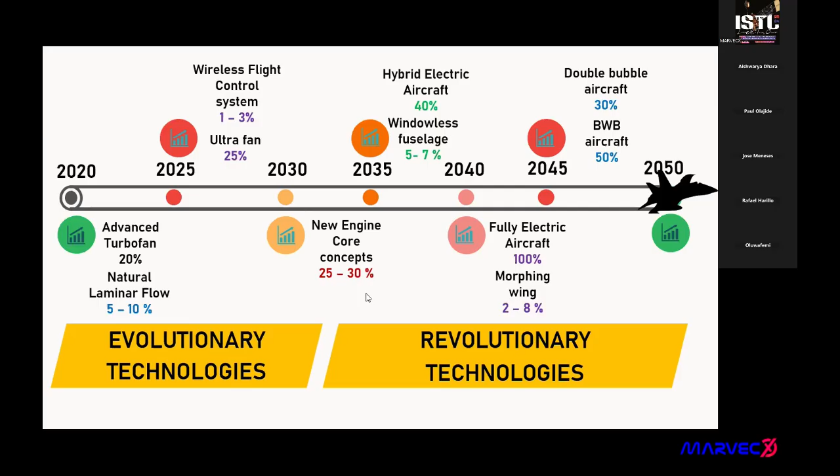As of now, we are seeing Airbus 350 flights, but in the future that's also going to get obsoleted, and we're going to see double bubble aircraft, where NASA is working on this kind of project, and more into blended wing body aircraft, where around 50% of carbon emissions and fuel burn is going to get reduced. Now, how to get that reduced, I will give you some basic overview.

Before getting started, as this session is primarily focused on machine learning and AI, let me give you a brief. What is AI? Maybe there are some audience who are quite new with what is AI.

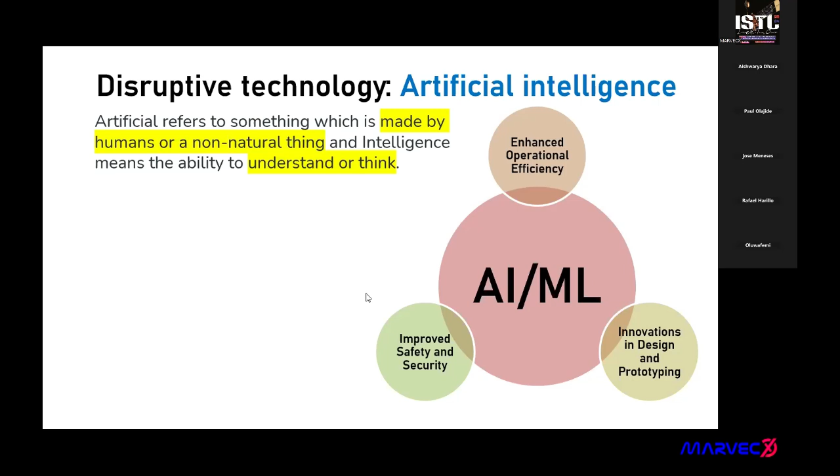When someone is creating something, or we can say a human is involved, which is not naturally formed, a human is involved to make that thing or to understand it, that becomes artificial intelligence. So a human is involved, reproducing the existing model. That is artificial intelligence.

Now how does artificial intelligence differ from machine learning? Machine learning is a part of artificial intelligence. A human is doing some programming, understanding the parameters, rephrasing the parameters, making something, and checking whether these things are feasible with one another or not. As I said, machine learning is part of AI, and nowadays we are using machine learning across different domains.

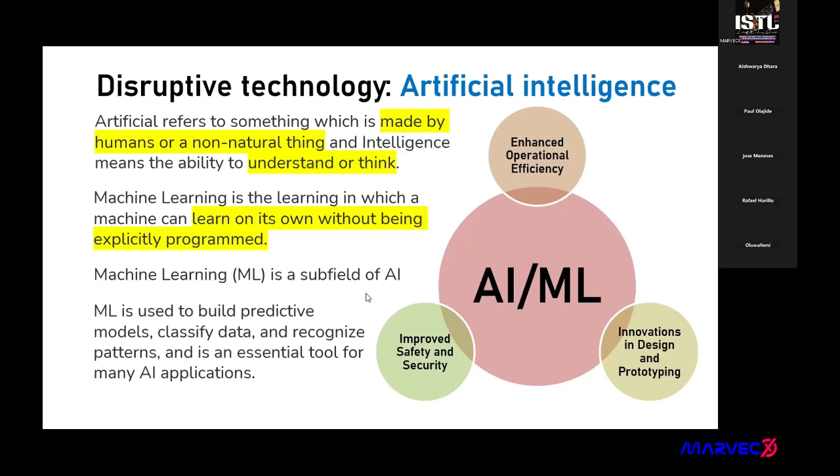Let's understand what is machine learning. Basically, machine learning is of different types. We have supervised machine learning, unsupervised, semi-supervised, and reinforcement learning. These are the prime types of machine learning, and furthermore this has been clustered into different other domains.

Here I have pointed out some of the very exciting, or most of the approaches or types of machine learning that are randomly used in the research field, especially in aerospace. If you are planning to propel your career towards machine learning, or already working on it, you can take it for granted that these are the following methods to consider.

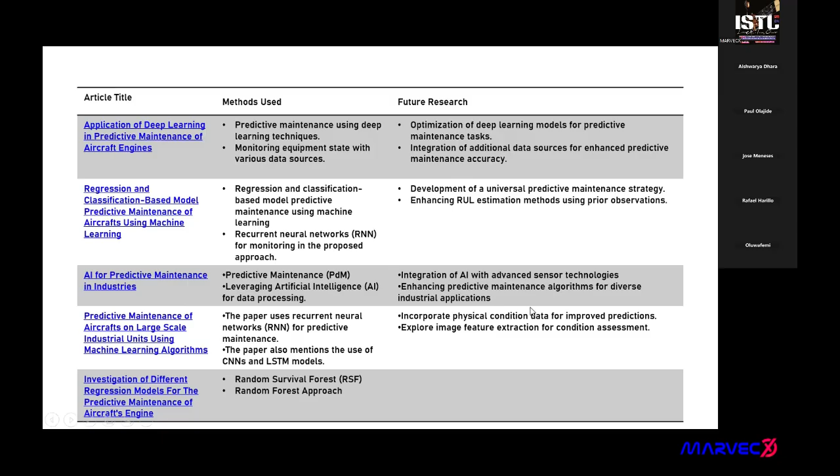How am I telling you this? Because there are certain research papers with exciting things they have mentioned, the methods, the way they have implemented on different applications. See, the application of deep learning in predictive maintenance of aircraft engines. They have used deep learning techniques, and in future they have said how further they can improve it. Each of these different types has a different way of approach, and they have given future insights on how we can further improve it and bring back better accuracy.

Understanding these facts, here I'm going to give you a basic 10 fundamentals outline of where and how we can use AI and machine learning in the aerospace and defense sector.

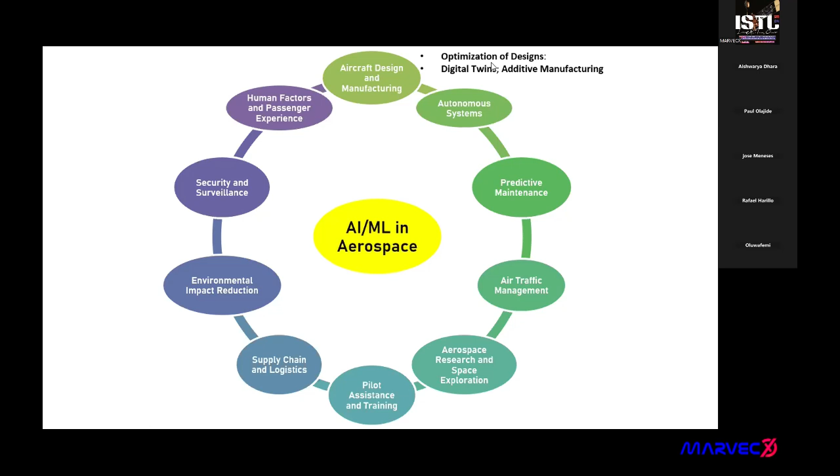The first and foremost I'm going to highlight here is aircraft design and manufacturing sector. How we can use it here, especially in optimizing design, digital twins, and additive manufacturing. But if I have to expand that idea behind aircraft design and manufacturing, there are further classifications, because when we say the simple word aircraft design, it's not as simple as it looks. There are so many things involved with aircraft design.

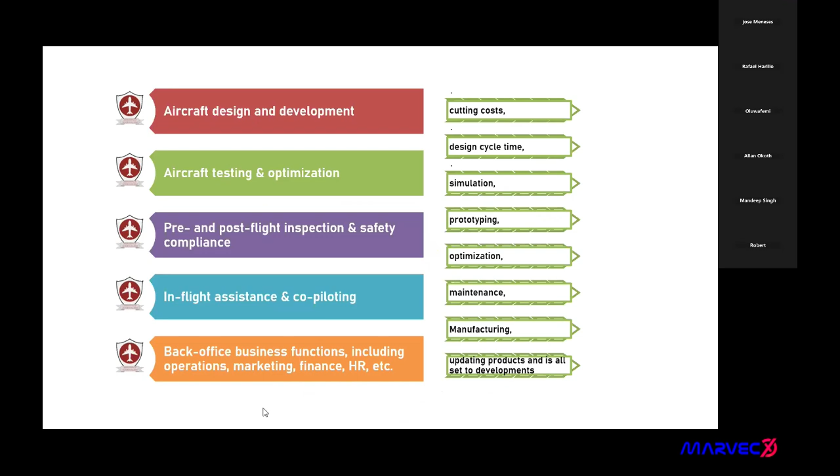There's development, testing, optimization, and once you have manufactured it, pre-flight inspection, post-flight inspection, checking safety compliances, then pilot assistance, co-piloting, then marketing. There are so many things, maintenance. There's a whole list ahead of me.

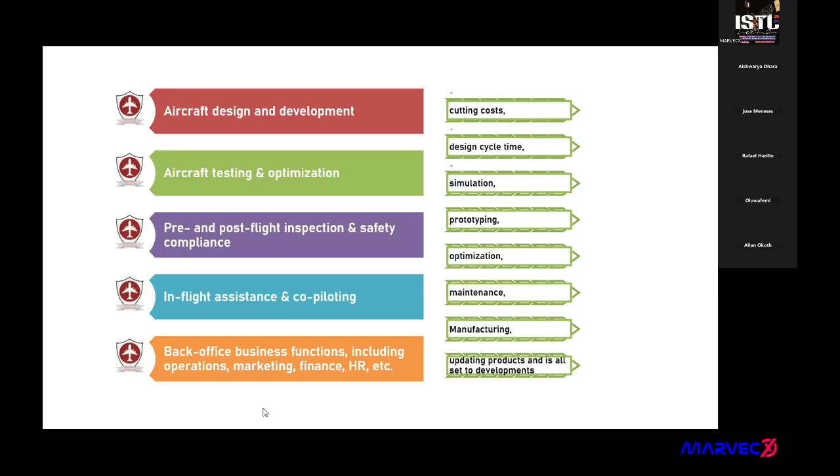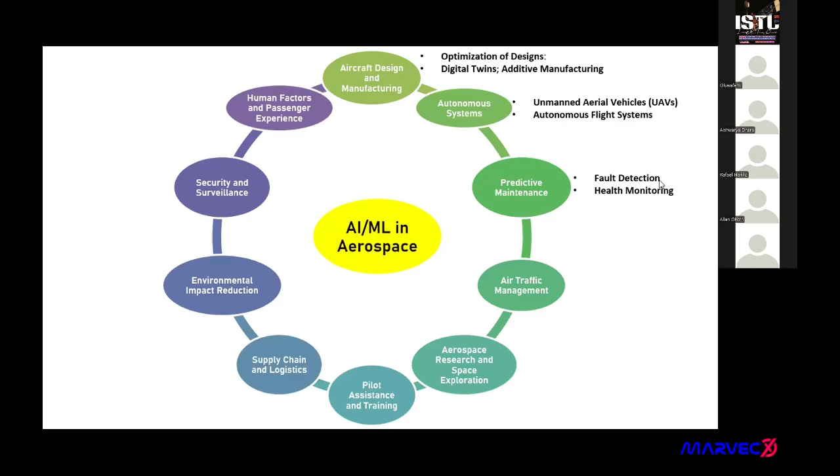Let me highlight predictive maintenance. What is it? It's about fault detection. You have an engine, and how will you predict that everything is fine with it, because there are so many complex designs and systems for an engine. So you use AI, or you use sensors, so that if anything goes wrong, you can find it.

Nowadays, in fact, in industries, they have started to use this practice of detecting faults. There is a pipeline in the industry or a boiler. If the temperature exceeds a certain level, they are able to predict that. So there is a lot of R&D happening in this fault detection.

Then comes health monitoring. This fault detection is one side, health monitoring is also playing a vital role. Nowadays they are utilizing this for agricultural sectors. Like you have a drone, and imagine you have an apple farm, or any kind of farm, and the drone is loitering across the farm.

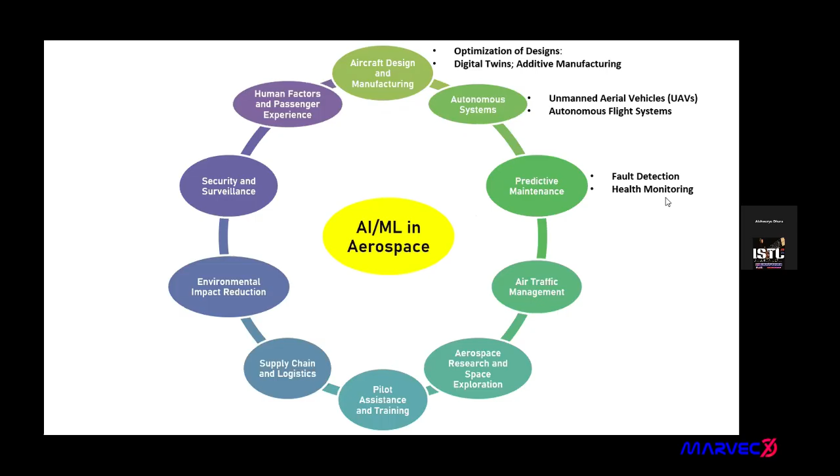With path planning and all, it is finding which particular tree is not healthy, or the fruits are not healthy, so it predicts and gives you a beep sound, and accordingly you can identify which is wrong, right? Accordingly you can do a lot of activities.

Now take an aircraft, and they give you a scheduling of it. So this aircraft has gone for this, now it is time for check A, check B, check C, and check D. So a lot of things can be utilized using predictive maintenance. It's a very wide scope if anyone is propelling their career or wants to start their own startup company.

Next is air traffic control management. As you know, there are certain busy airports, and nowadays we can find airports with queues on the runway or the taxiing zone. So they are implementing in their portal things like flight scheduling optimization, collision avoidance systems, and efficient airspace utilization. How effectively they can utilize the space depends on country to country, and how each governing rule applies.

Next comes aerospace research and space exploration. As many of you might know, the main motto of this talk is sustainable development, how we can do it using AI and ML. We are launching a rocket, we are launching a satellite, that's fine, but how can we make it more effective?

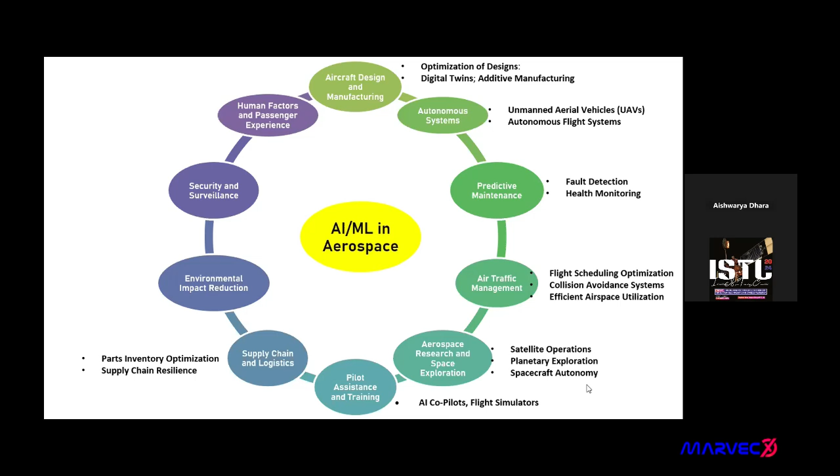Now, many countries have already started this work using AI/ML in supply chain and logistics. For inventory or supply chain resilience, they can plan where the inventory sectors are, how they can transport from one point to another. AI plays a very vital role, and most defense sectors are already practicing this for their supply chain and logistics.

Next, as I have said, this is about environmental impact reduction and how AI/ML helps. I will give you a small practical demonstration from one of my research projects, just the highlights of how using AI/ML you can achieve environmental impact reduction.

So it has a very vital role in fuel efficiency and optimization, and eco-friendly aircraft design. Nowadays there are different aircrafts coming up, including electric vehicle aircraft that Airbus is planning to manufacture in the 2050s, and many more aircrafts coming in the future. All of them are working on AI and ML when it comes to aircraft design, saving fuel, or reducing carbon footprints.

Security and surveillance is also quite relevant, with monitoring systems and cybersecurity. Both play a very vital role when it comes to AI and ML.

Now let me highlight one more important point, the human factor and passenger experience. You might be thinking, okay, humans are not involved in AI and ML, so how can we give a human factor and passenger experience? Yes, it plays a very vital role for any airlines, because the first and foremost priority of running any airline is to take care of

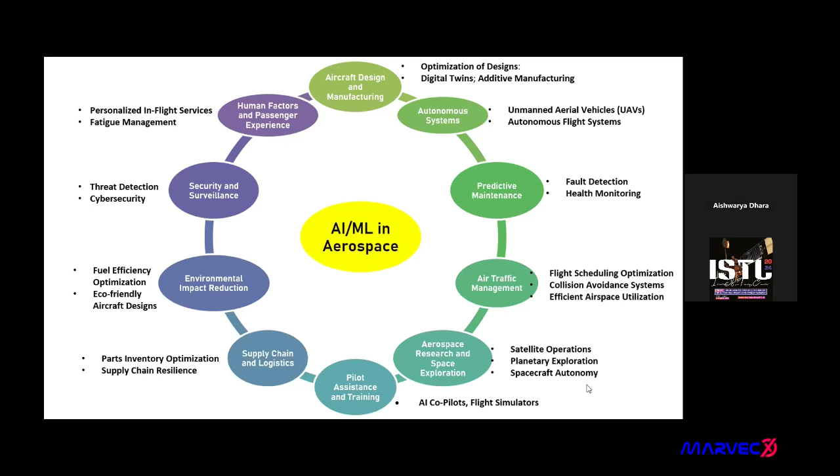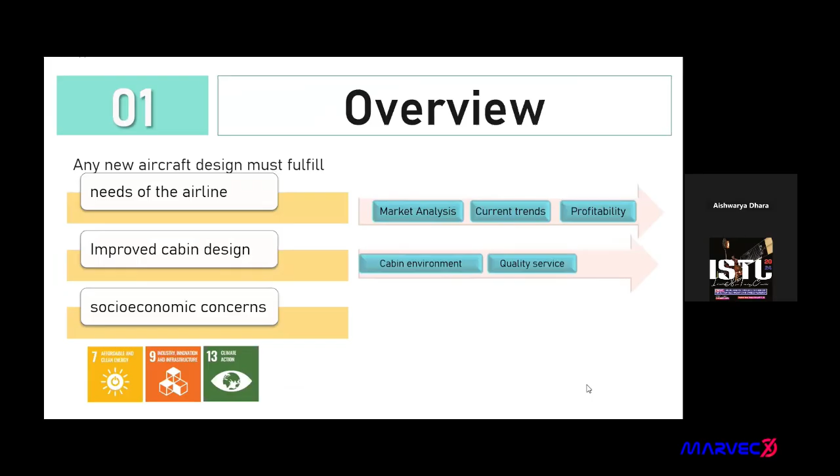Now, coming back, as I said I'm going to focus on some practicals. Let me give you more highlights on new aircraft design. We need to understand market trends and improve profitability, and as I highlighted with human comforts, you should take care of cabin environment, quality services, and ambience. Now let me connect this to how it plays a vital role in socio-economic concerns.

One current trend is a concept called retrofit—reduced emission of transport aircraft operations by fleetwise implementation of new technology. This particular term explains a lot.

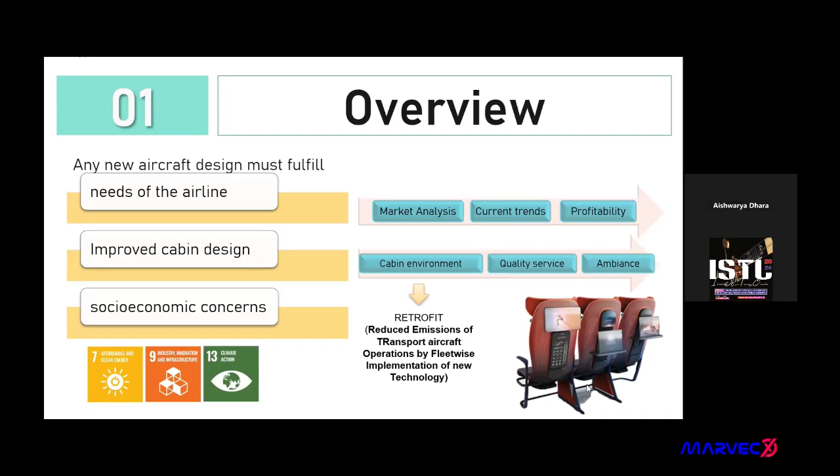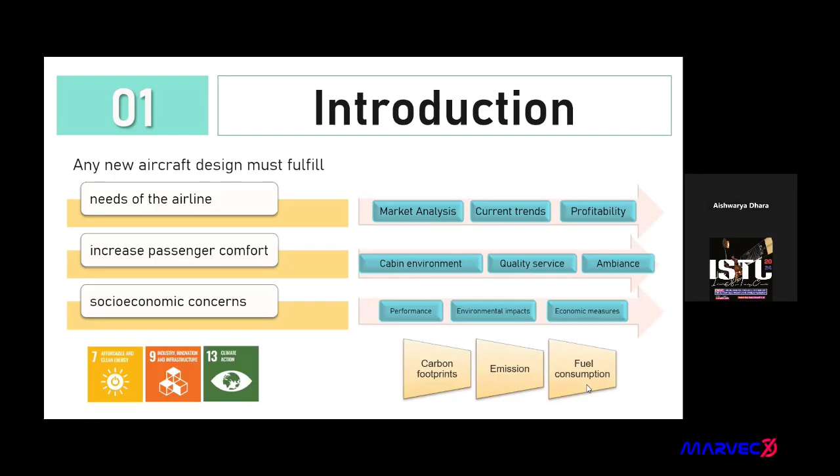You'll be surprised to know how quality service plays a vital role in terms of performance, environmental impacts, and economic measures. On the other side, carbon footprints, emissions, and fuel consumption are quite related with one another.

All of this comes under retrofit, which helps reduce emissions. At the same time, let me give you some statistical values on the percentage that helps with reduction.

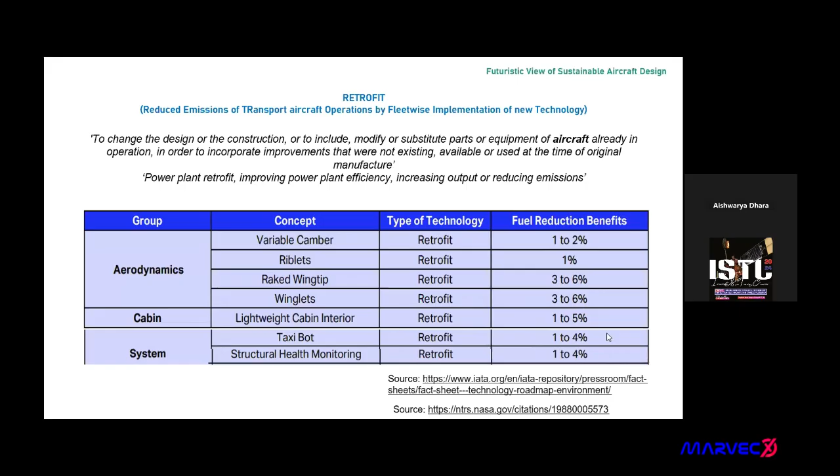Now let me give you some more highlights. Who are the people really working on it? When it comes to emission, emission basically emits not only from the design that you make, but the engine plays a vital role too. So what are the prime engines we can see in the upcoming era?

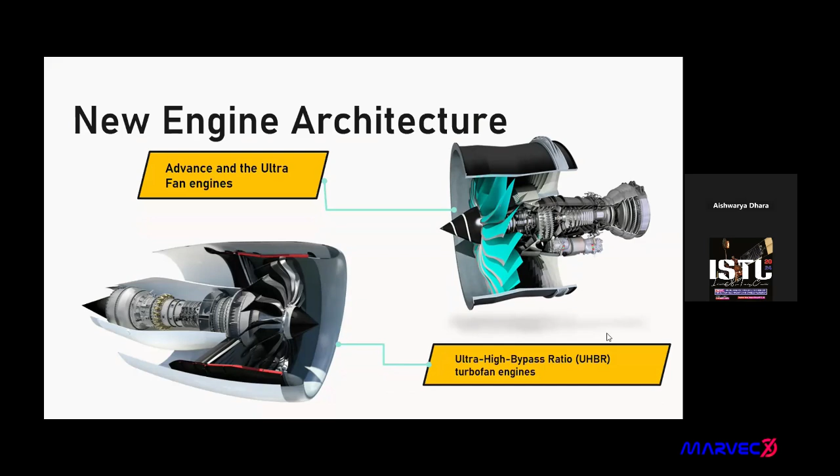That is advanced ultra fan engines. Another one is ultra high bypass ratio turbofans, where this bypass ratio is going to be more than 10. Second is the aircraft system.

As you can see how much amount is used during the taxiing phase, if we are using electric taxiing. There is a company called Safran developing this concept. Around 51 percent of nitrogen oxides, 61 percent of carbon dioxide, 62 percent of hydrocarbon, and around 73 percent of carbon monoxide can be reduced. This process takes hardly 3 to 6 minutes to perform, and in that time this much carbon emission can be reduced. It's a lot of revolution, you can say.

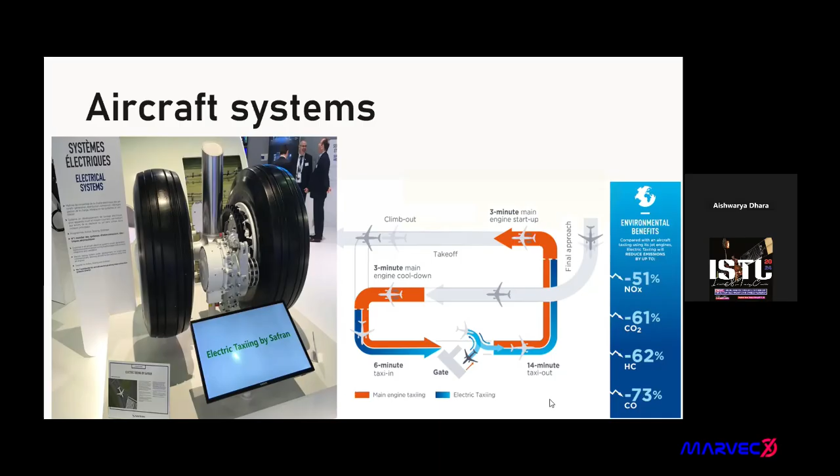Now I will give you a brief of some more research papers working on AI and ML, and what is the basic approach to undergo machine learning. I will give you an overview of my research, how I have reduced a lot, how to find the robustness of your model, and how you can implement it in real world scenarios.

Basically, when you want to start machine learning, the first and foremost thing required is data collection. So what are the different parameters when you're collecting data? For example, I will show you this data.

Now the question comes, how will you know the data you have taken is sufficient, or whether the number of rows, number of columns, or any other parameters are needed? The basic understanding is that first is data collection, and you need a large amount of dataset when you want to work on the machine learning approach.

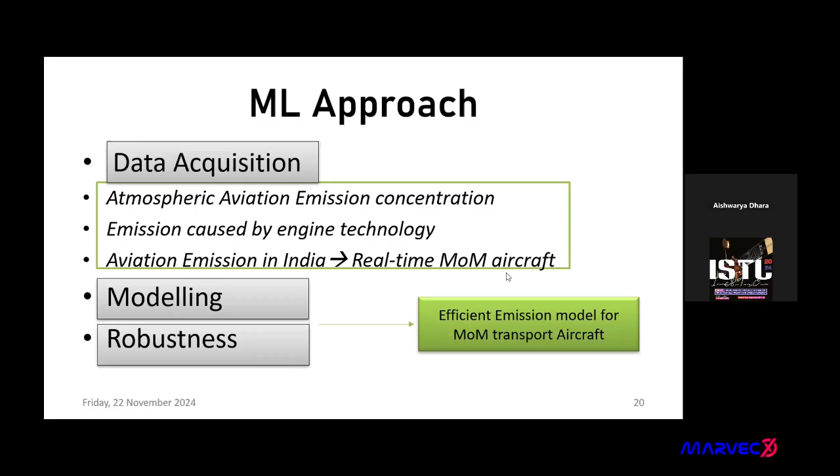The first and foremost thing when proceeding is to identify the correlation factors, so that we can mathematically find the relationships. Here I have used a linear regression method. In linear regression, we identify the parameter using a value ranging between 0 to 1. If it is close to 1, that parameter is strongly connected; if it is less than 0.5, it means very less than moderate value.

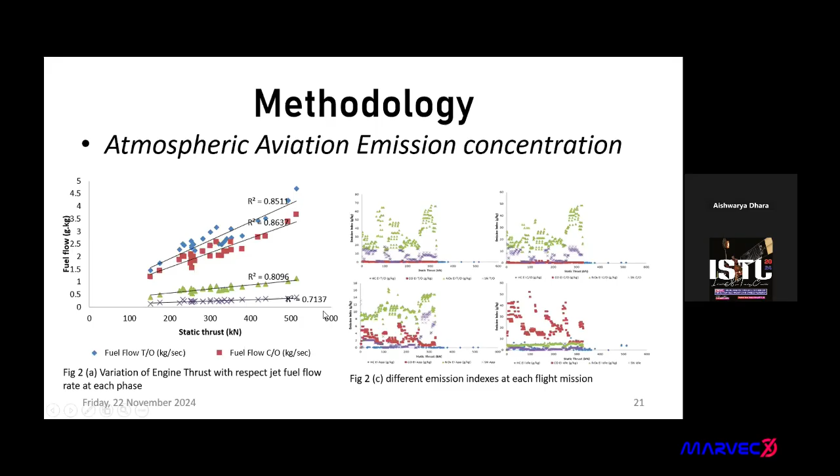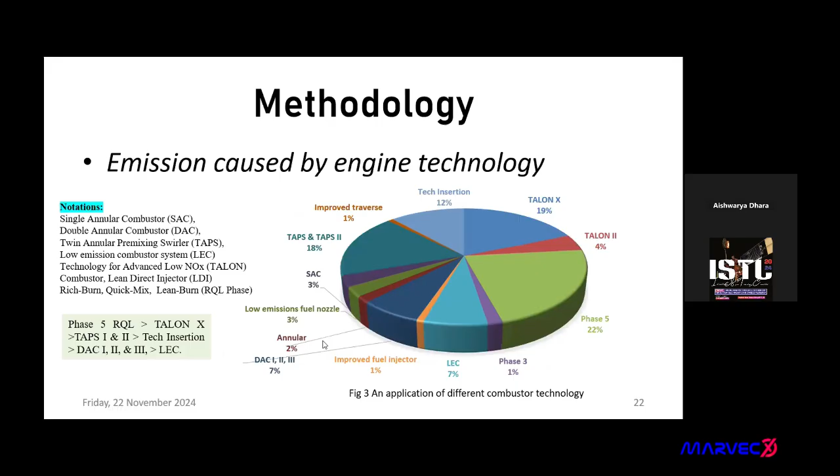Here you can see the parameters I obtained, which are close to 1, that is 0.85, 0.86, 0.8, and 0.7, close to that. So understanding these parameters and how they play a very vital role in engine technologies, each engine has its own technology and implementation, right?

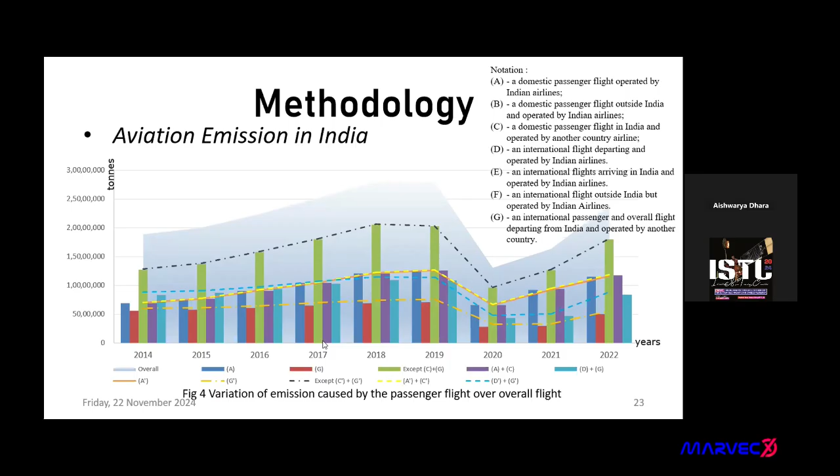Understanding the number of aircraft traveling from India abroad, this is statistical data I obtained on aviation emissions, especially in India. So what are the domestic flights flying within India, and from India to other countries? There are different sets of notations given, for understanding the key parameters.

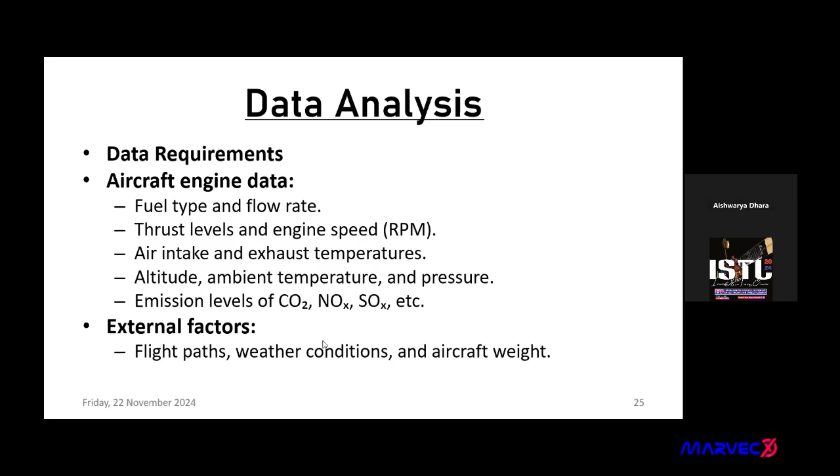Furthermore, we have also collected the engine data and other things. Let me show you the final result. After that, I obtained different cases and used regression methods on those parameters. There are a lot of software options you can use.

They can use MATLAB, or Python, Anaconda, Jupyter Notebooks. There are a lot of options wherever you're comfortable, you can work on those.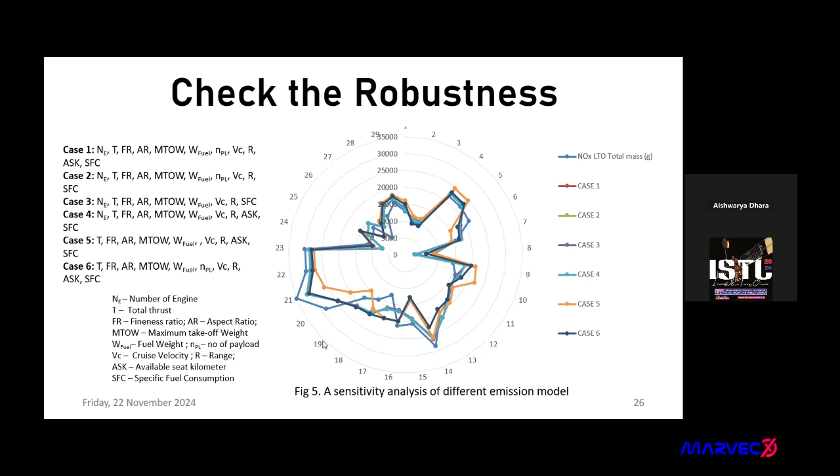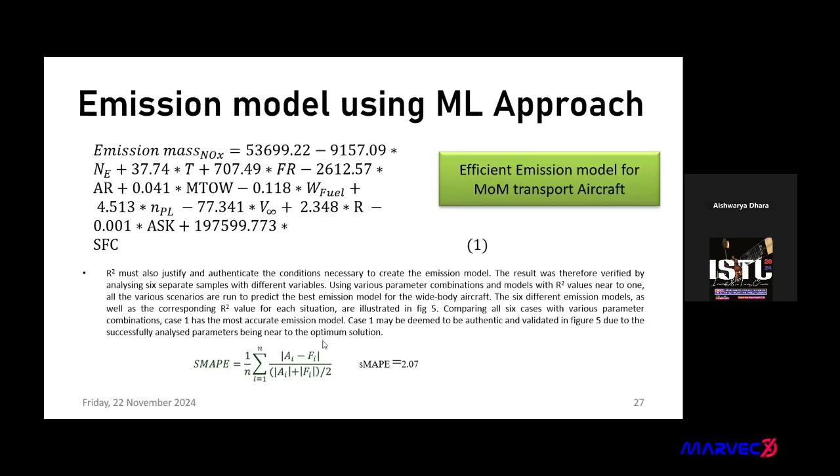I have taken 6 different cases to understand the robustness of the parameters, and finally obtained a very novel solution that shows, if you're designing a different aircraft and utilizing this particular equation, you can obtain a suitable answer for your aircraft's emission model.

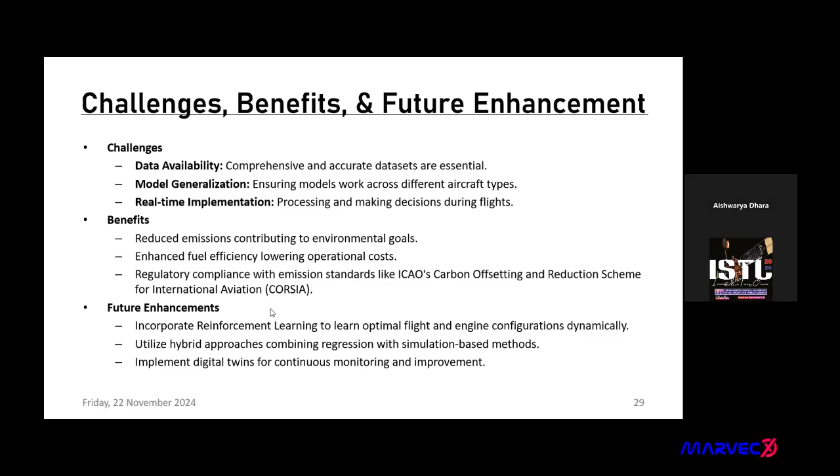There are a lot of benefits to using this. In fact, there's a sector, ICAO, the Carbon Offsetting and Reduction Scheme for International Aviation, that plays a very vital role. They fund you, provide different grants and so on. I hope I have given you a good overview about AI/ML, especially in aviation and aerospace.